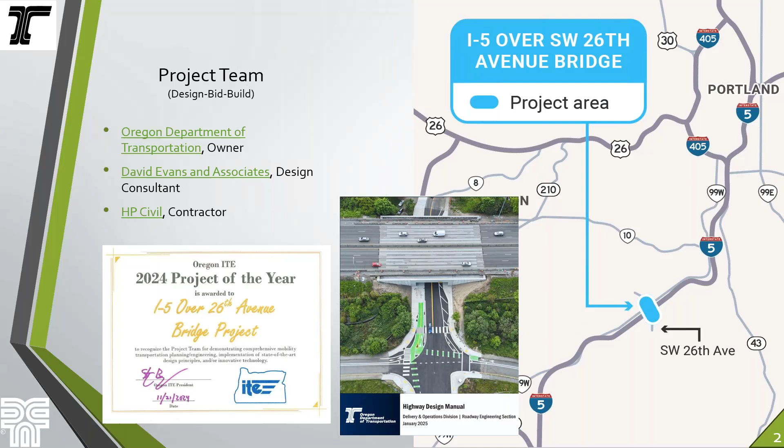Next slide. So just a quick snapshot of the facility. You can see that it's pretty heavy on trucks, heavy vehicles.

Our goal was to replace the bridge with minimum impacts to I-5. Next slide.

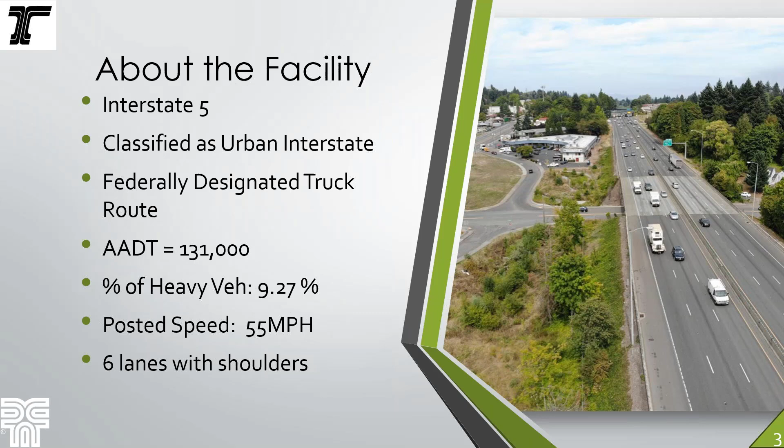So thanks, Robert. I'll take over from here and speak a little bit about the bridge. The existing bridge was a 3-span concrete deck girder bridge built in 1959 and was widened and overlaid in 1985 because the details of the bridge couldn't keep up with the loads that our transportation facilities were exposed to over time. There was some cracking in the deck and some delamination that justified the overlay, and then soon after the overlay was placed, it continued to crack and delaminate.

The facility, I-5, has very substandard shoulders and is highly congested in this area with long hours of delay. And the existing bridge is supported on timber piles. There was a project before ours to consider retrofitting this bridge, doing a seismic rehabilitation, and they decided that it would cost too much to do the rehabilitation and replacement was justified.

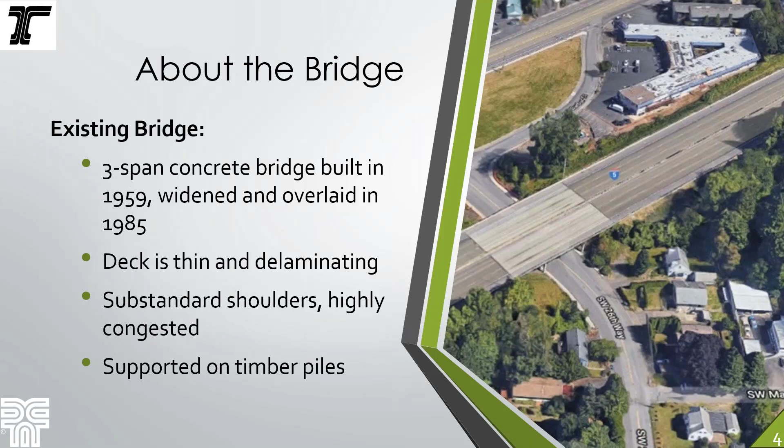So the objectives for our project were to replace the structure with a new structure that could meet today's seismic standards, and static design standards for that matter, using traditional construction methods. That was the original scope of the project. We were to maintain all 6 lanes of traffic, 3 lanes each way, at all times. We were going to widen the shoulders from 10 feet to 12 feet so that when maintenance crews are out there, they don't have to close a lane down.

And there was an adjacent City of Portland project where they were improving the local street underneath. And so we coordinated with the city to construct part of that project for them as part of this project and tie into the rest of their project.

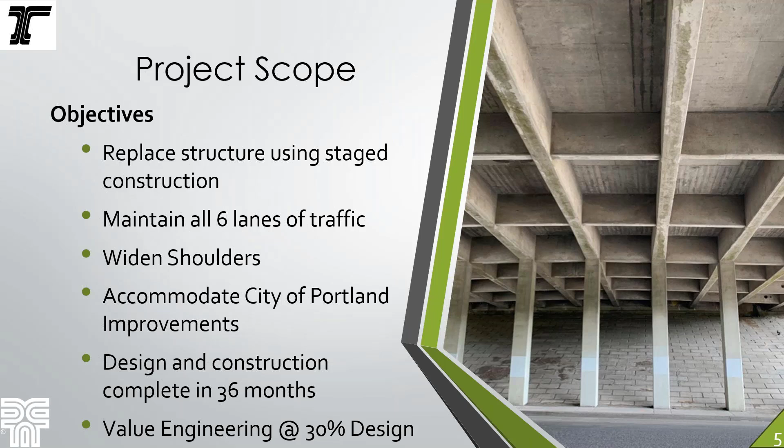Design and construction was to be completed within 36 months. That was primarily because ODOT had many large projects in the metro area that were going to be constructed starting in 2025. So we had to do our project in a somewhat accelerated time in order to have our construction complete in 2024. And as part of this project, ODOT wanted to do a value engineering study to make sure they were the best stewards of the public money they could be for this facility.

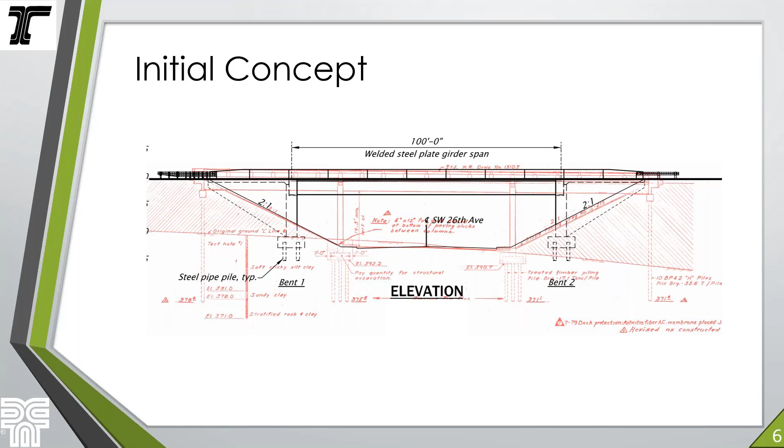So we started working on our 30% design. The existing bridge was a 3-span reinforced concrete deck girder structure, shown in red on this view. In black is the replacement, the 30% design. It was a 100-foot long welded steel plate girder with the supports located between the existing abutments and the interior piers. The concept was we would demolish the existing 3-span bridge and construct the single-span structure using stage construction methods, completed in 5 stages.

And there would be an island work zone where the contractor would be working in between traffic. A detour bridge would be constructed in order to shift traffic off the existing southbound direction, and they would maintain traffic in the northbound direction in stage 3. That's the island work zone. Then there would be traditional shifting of traffic, stage construction and demolition from that point on. At the 30% design, our construction cost was estimated at just over $19 million.

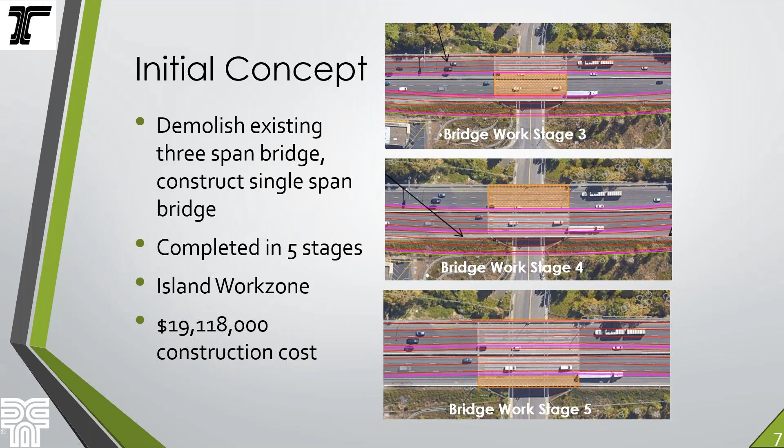So some of the risks around the more traditional construction approach at 30% design was that right-of-way was very tight. We didn't have a lot of room to put in the detour bridge. It was going to be substandard alignments, or pushing the limits anyway on the alignments for the detour structure, and we'd be right up against the right-of-way.

There is a water quality facility that was located adjacent to the structure. And that facility treats the stormwater for quite a long range along I-5, as well as the local streets in this area, because the bridge is located kind of in the dip of this region. It's kind of the low spot in a region here, and so a lot of the stormwater comes to this water quality facility, and impacting that facility, which would have been impacted by our detour bridge, would require upgrading that facility to current standards, which would have cost millions of dollars just in itself.

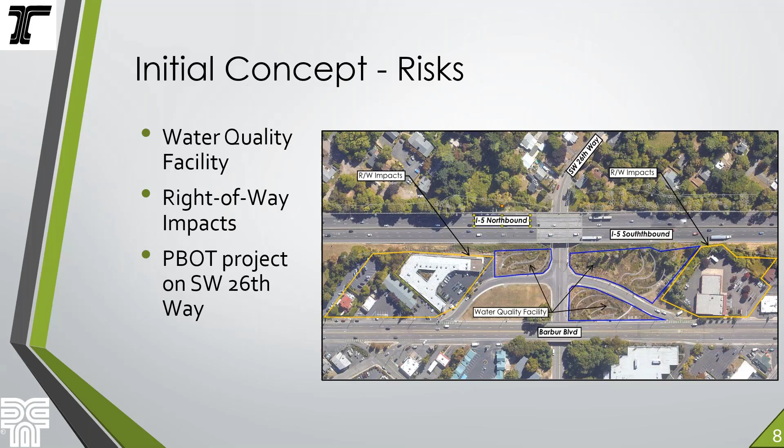And then, of course, as I mentioned before, there was the PBOT project on 26th Way that we had to accommodate as well, and that factored into some of our decisions there. So at that time, we got to the 30% design, and that was the scheduled time to go through a value engineering process. This group probably has been involved in these processes before, but just to give a little bit of information,

it can be an extremely important process for projects to make sure that the use of the public funds are going as far as they can be. When it's done right, I'll say, it's a very systematic and structured approach to figure out how to get the most value out of a project, the products, the processes, and the services.

And one of the most important aspects of it is really to put on your creative hat and think outside the box and see if there's some innovations that you can do, or some ways to really capitalize on that value. And of course, the value is increased by increasing your performance of the requirements that you're trying to satisfy. But value is also largely increased by reducing cost, time, and risk.

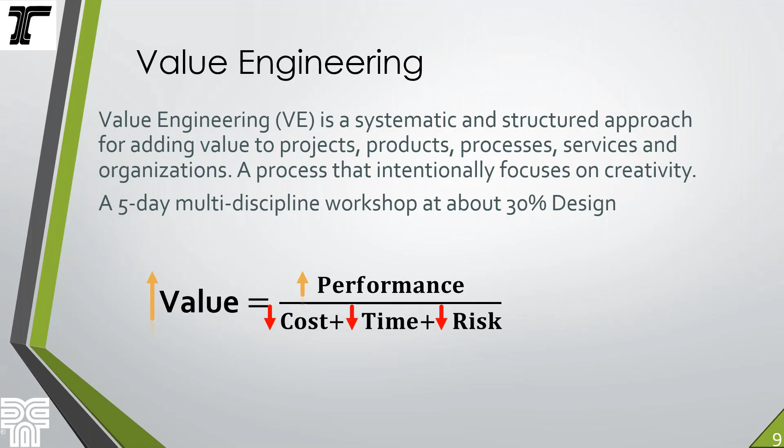So there were, I think, 10 alternatives that were proposed by the value engineering team. It was a mixed team of consultant staff and agency staff, and the design team was a part of the process, of course, in helping the VE team lay out the requirements, or the goals, I guess, for the VE study, and then also responding to the VE alternatives that were presented.

So this first one was presented as the one that would have the most value. It was essentially to build a 3-sided box, like a concrete arch culvert, you might say, in the center span of the existing bridge, and to fill around that culvert with low density cellular concrete up to the bottom of the deck of the existing bridge. And the benefit to that was the existing bridge would just be left in place. It would be supported by the low density cellular concrete, and effectively by the new concrete arch structure. And then a lot of the issues with the deck were believed to be taken care of because it's now supported on concrete.

I disagreed with that a little bit when it was presented and in our response to it. Just the difficulties in making sure that the LDCC would actually solve the problems with the deck. I really struggled with that. So there were some constructability issues that I was concerned with. I felt like the condition of the deck was bad enough. It would just remain bad enough so the asphalt overlay that would be put on top of the deck would still become cracked and have a reduced service life because of that. Also, all of the weight of the bridge is still supported on timber piles, of which we'd have no idea of the condition, and they provide no seismic stability.

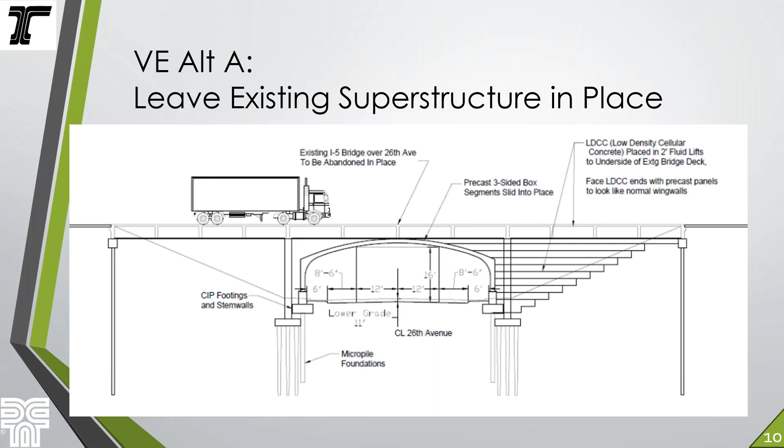So the next idea that they came up with is the one that we talked about internally and decided that this would be still a great value for the project. I'll call it Alt B; it's very similar to Alt A, the first one, in that it's still building a three-sided box in the center span, placing LDCC around that structure, but only taking the LDCC up to about the bottom of the existing superstructure.

And then, after that is all constructed, demolishing the existing superstructure and replacing it with fill and ag base and pavement, so that you're not actually driving on the deck of the existing bridge that's in poor condition. So it mitigated the deck condition concerns, and mitigated the concerns about the timber piles because the load of the structure is no longer supported on the timber piles.

But both of these options, I should mention, have pretty restrictive clearances with the shape of the arch. A lot of these arch products are limiting in the clearance. So both alternative A and alternative B required lowering of the existing road, which had some complications associated with it, and also required the traffic to be located right in the center of the arch because of the rounded shape at the top of it. We did talk about some other structure types that didn't have that rounded shape, and afforded us the ability to kind of open things up a little bit more underneath there.

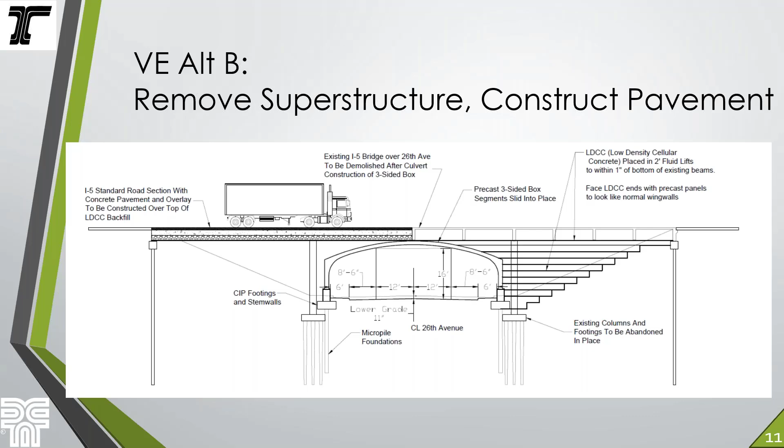I want to note that the VE alternative assumed that the demolition of the existing bridge would happen in stages, and that was troubling to the traffic team. And so our final concept was similar to alternative B, where we ended up demolishing the existing superstructure, but instead of using the arch culvert section, we used an ODOT standard pre-stressed precast concrete slab, and that opened up that clearance to 26th Avenue a little bit. It had a more consistent clearance, I should say, across the whole width of the required horizontal opening, and allowed us some flexibility from a traffic standpoint if we wanted to stage traffic within that opening somewhat.

We ended up not lowering 26 because of all the complications that were associated with that. We felt like we could just live with, I guess you might say, the clearances that we end up with. And since no trucks really have to go under here, we settled on a number that everybody was happy with.

Something that wasn't addressed in the VE study was settlement mitigation, because we were using low density cellular concrete, but even with the lightweight nature of that fill, there still was some additional settlement concern because of the softness of the soils here. And we have the existing bridge supported on piles that we didn't want to add down drag loads onto. So we had to employ some settlement mitigation that I'll talk about a little bit later on.

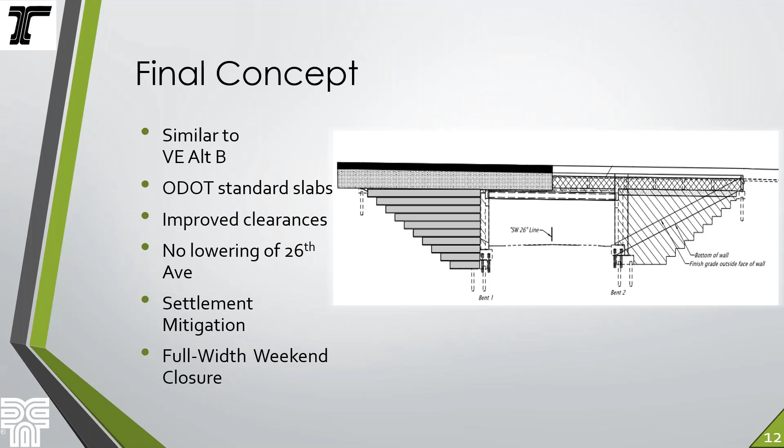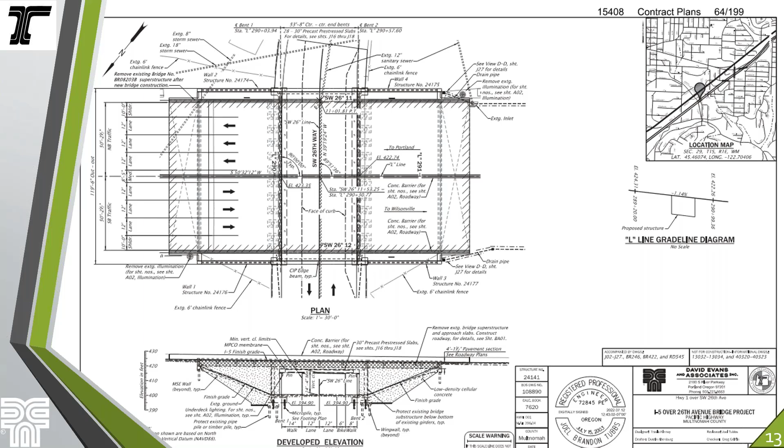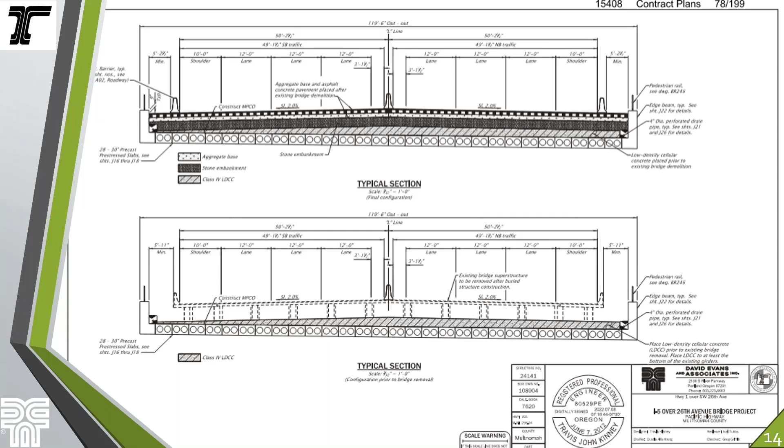The upper typical section there is the final condition with some edge beams along the side to retain the fill that's on top of the slabs. We called for stone embankment on top of the LDCC, ag base on top of that, and then asphalt pavement on top of that.

So a few things about maintenance of traffic for this project. We were allowed to close down 26th Avenue, the local road underneath, for all the construction of the bridge, really. And there was a short local detour. I don't have a map of that detour, but it was reasonably short. Cars can get around easily, and the community can get to where they need to go by car pretty easily. The 6 lanes, 3 lanes each way of I-5, were maintained, except for that weekend closure. There were also some nighttime closures after the weekend closure to do some final lift paving that we'll talk about a little bit later as well.

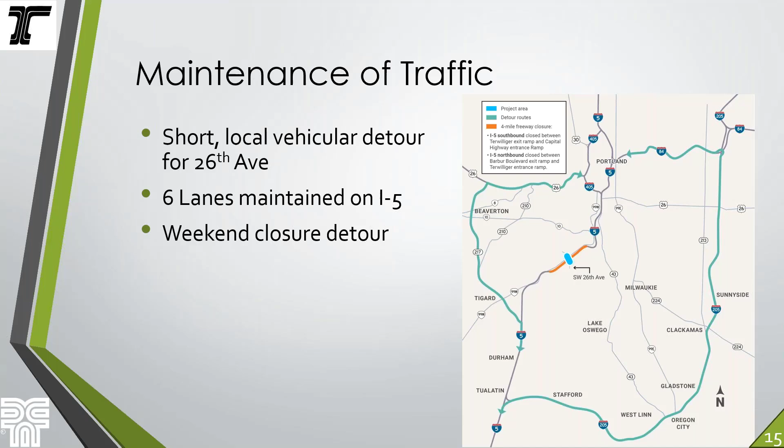But from a pedestrian standpoint, the vehicular detour was too long, reasonably, for pedestrians. And so this option really afforded us the ability to maintain pedestrians through the construction zone, through the mid span or the center span of the existing bridge, while they're doing the fill in the end spans.

I can't tell you how many people I heard from. There were several people that I heard from, both the people that I work with and members of the community, that were really pleased with our ability to maintain pedestrians through this area, because there's a local taco truck that is parked nearby that is a really popular destination for the community. So I thought that was kind of funny.

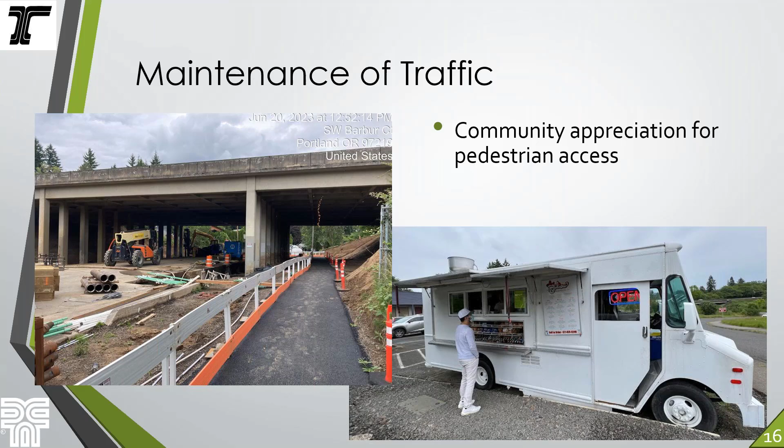Also, just side note, my parents love to go to different project sites with me. This was one of their favorites, and I would take them here, and we had the ability to walk basically all through on the pedestrian route here and check out the construction kind of as it was going on, and they just love that.

So the highlights of this concept and this project were: you reduce impacts to I-5 traffic. Instead of having 2 years of traffic impacts on I-5, it really reduces it down to about a weekend plus some nighttime closures. The bridge, this is one of my favorite stats about this project. For the bridge construction as well as the demolition, there was no I-5 traffic in the work zone. All of the work was either happening under I-5 for the construction, or the traffic was diverted around or detoured around other areas so that during the demolition, it was just a full width closure with no I-5 traffic.

The project reduced construction costs, as Robert mentioned, and reduced the construction duration, and the pedestrians were easily accommodated. The bad, of course, you have to fully close I-5, and there's, I'll say, never a good time to do that, but with a lot of communication, I think it went pretty well. You've also got to figure out how to build a bridge under live traffic, and then how to demo the existing bridge on top of the elements that you just constructed. So those were some of the challenges.

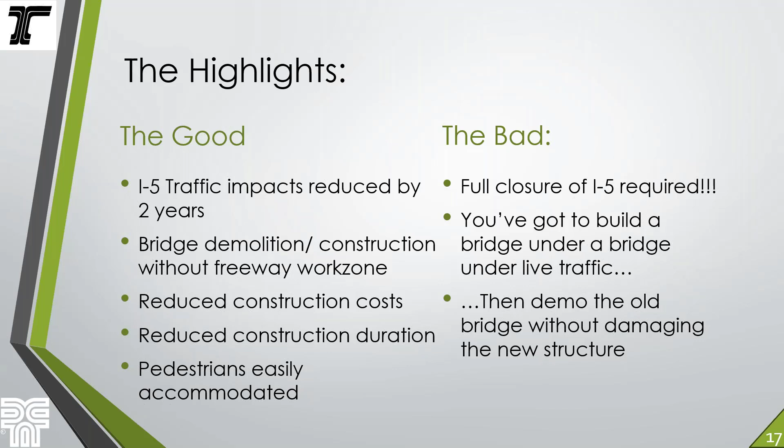So in the presentation here, I'm going to talk a lot about the accelerated bridge construction and other specialized techniques that we employed in order to accomplish this project. And the first one is a contractor constructability review. One thing I want to mention, especially for this crowd, I'm sure there's a lot of people here that have a lot of experience with any one of these elements. And it's not that any one of these are all that unique per se, but this project combined a lot of different techniques, and I think that's kind of what makes it special, at least for us here in Oregon. The contractor constructability review, I'll talk about that more in a few minutes, but that was a very important part to give us confidence in what we're doing.

We used micropile foundations due to the overhead limitations. We have precast concrete elements with the slabs. We laterally translated those beams underneath the existing bridge because we didn't have access vertically. We had to come up with a way to connect the slabs to the abutments after sliding them in with overhead restrictions. So that was a specialized detail we came up with. We used low density cellular concrete not only for the fill behind the abutments, but also for the reinforced fill of what's typically called a mechanically stabilized earth wall. But this is a mechanically stabilized low density cellular concrete filled wall.

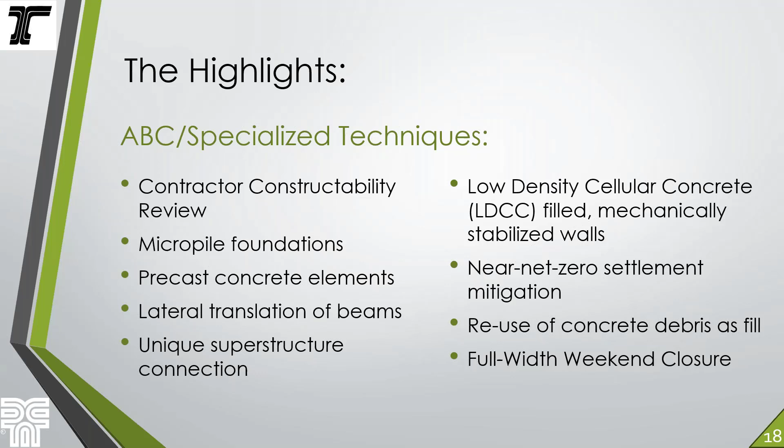For settlement mitigation, we used a near net zero approach where we over excavated to achieve basically a near net zero difference in pressure at the excavated surface of the ground. This was a concept from the contractor that came out of the constructability review session, but we reused the concrete debris from the demolition as fill underneath the ag base. And then we had the full width weekend closure for the project.

So the constructability, I'm not going to spend a whole lot of time on all these slides. We've got a lot of slides to get through, so I'm going to touch on some high points here. But the constructability review sessions with the contractors were one-on-one sessions with 7 different contractors. They can say what they want to, but everybody knew going into it that all of the findings or all the discussion was going to be published with all of the other contractors that attended the sessions.

And so some of the items the design team was wondering about was the bridge demolition, how best to do that, and can we get that done in a weekend? The micropile installation, we wanted to get some specific information about recommendations for that. The bridge construction, of course, how to accomplish getting the beams where they need to go, some of the specific details about how to connect the beams to the abutment and all that. The pavement construction, again, can you get that done? What are some things that we can do to make sure that can happen within that weekend closure?

The retaining wall construction: at the time we did the constructability review, we were assuming soldier pile walls to retain the low density cellular concrete, and that was because these LDCC filled MSE walls are not something that's commonly done in Oregon. It was only done one other time that I'm aware of for ODOT, and on a much smaller scale. And so we had to go through a process to get that figured out.

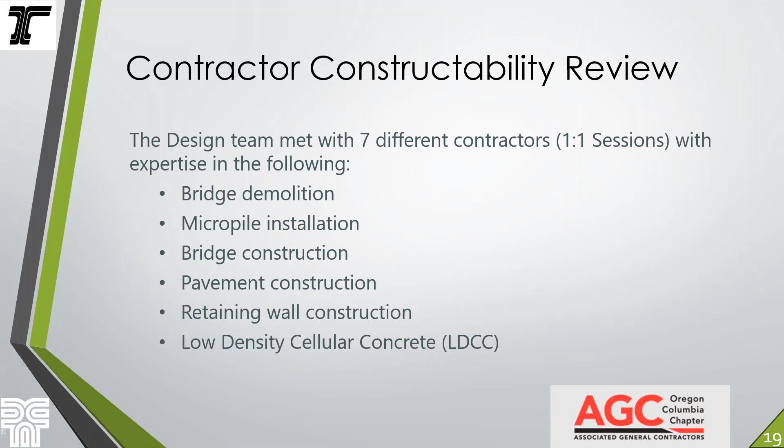Some of the findings or opportunities that came out of that review were to allow the bridge debris to be used as a sub-base underneath the ag base. And so we decided to go ahead and allow that. One of the suggestions from the contractors was to provide a staging and stockpile area near the site, and also allow off-road haul trucks that could handle more load on the freeway between that site and the project site, and also to switch from the soldier pile wall to the MSE wall.

We had mentioned our idea of using an MSE wall with the LDCC, but that we didn't think that our schedule accommodated the approval process to get that through, and they said it's a much better idea to try and just get through that process and use an MSE wall instead of a soldier pile wall.

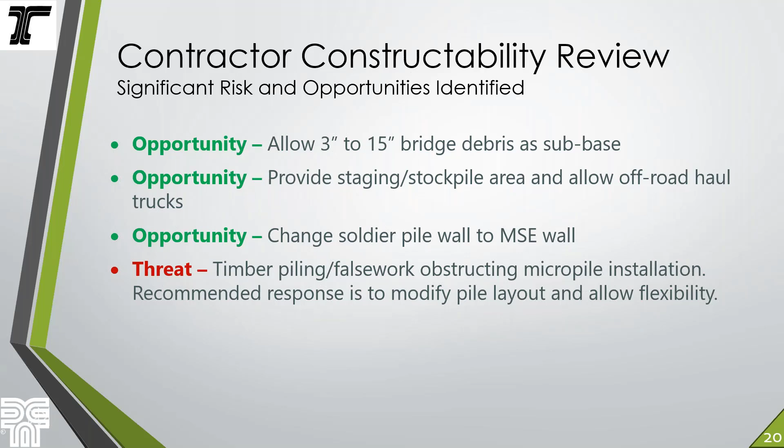And then they also mentioned the concern about timber piling, these kind of known unknowns, you might say, from a risk standpoint: we know that there's timber piles under the footings, but there's also possibly falsework timber piles underneath that we'd have to deal with. So I'm trying to figure out if there's a concern about that.

So getting into a little bit more detail about each one of these things, I mentioned the very soft soil, so deep foundations were required. We couldn't use shallow foundations. We had no vertical access to do traditional driven piles. And we had to do all this work with the existing bridge under live traffic.

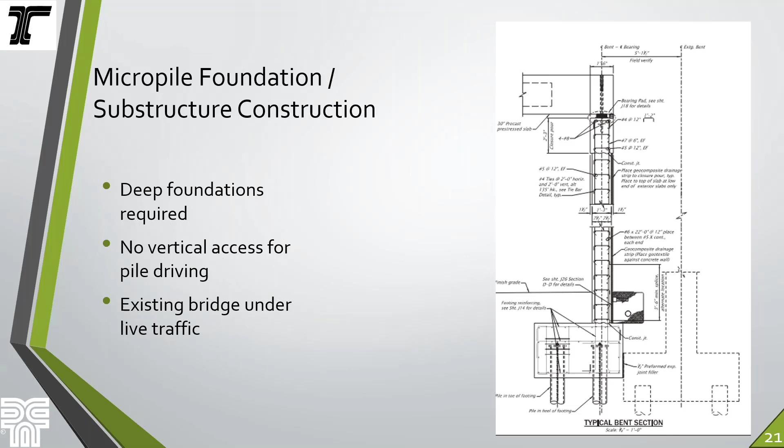One point I wanted to make on this one was that we tried to locate the existing footings, but we had limited scope in order to do that. We didn't do a thorough enough job. So we ran into some issues during the design where not every footing was exactly where we thought it was, and we had planned on building our footings effectively right up against the existing footing. So that created some issues during construction that we had to deal with.

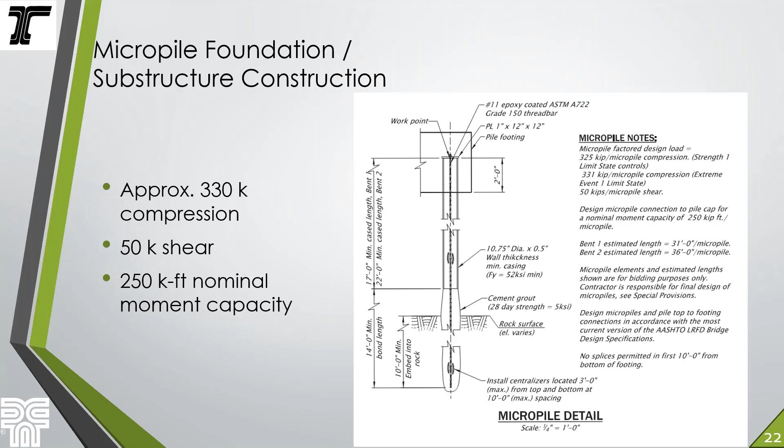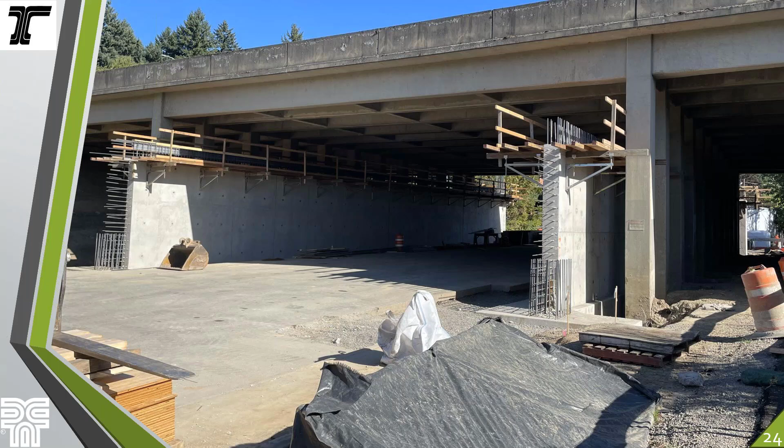This is a shot of after the abutment walls were constructed. This is the end from which the slabs would be slid underneath the existing bridge. So you can see some things are unfinished, to accommodate the translation of those beams. One of the interesting things, the feedback I got from the contractor, and you can see it in this picture, is they loved this job because it was all underneath the existing bridge. So in the heat of the summer, they had a nice shady area to work in. And in the downpour of the rain, similar situation.

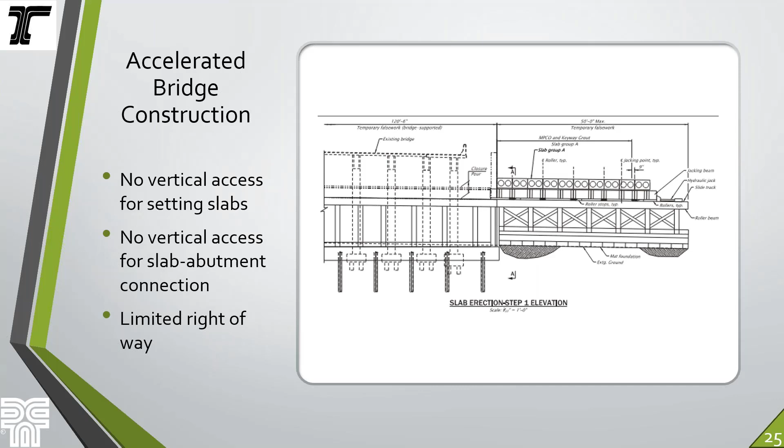So the next thing is accelerated bridge construction. Again, there's no vertical access for setting the slabs, and no vertical access for connecting the slabs to the abutments, and there was limited right of way. So we came up in design with a scheme that the contractor actually followed pretty closely, which was, with the limited width that we had to work in from a right-of-way perspective and for other impacts from the water quality facility,

we build some temporary falsework to the, I'll say route direction west side of the freeway. And we would set 10 slabs, that's all the room that we had there. 10 of the 28 slabs would be set first. We would connect all those together following traditional standard ODOT details, and put a waterproofing membrane using a multi-layer polymer concrete overlay, which added a little bit more protection also for demolition.

And then in step 2, we would slide those 10 under the existing bridge, set 10 more, go through the whole process again, connecting it to the first 10, and then slide all 20 of those beams underneath the existing bridge, set the remaining 8 beams and connect them with the previous ones, and then slide all 28 in step 4 to their final position, and then remove all the false work after the beams were set on the bearing pads.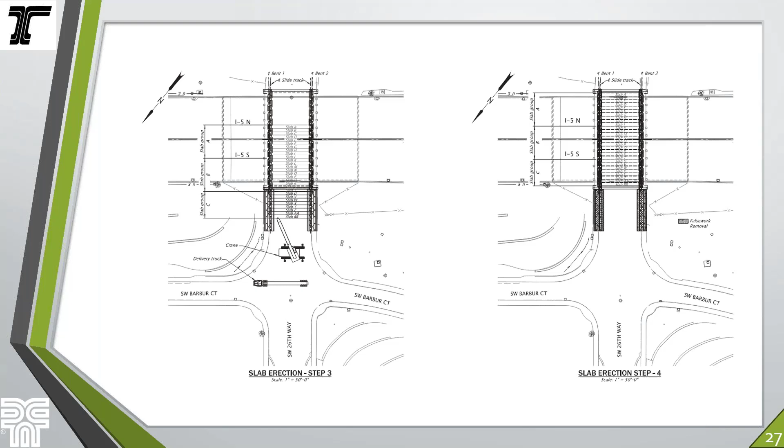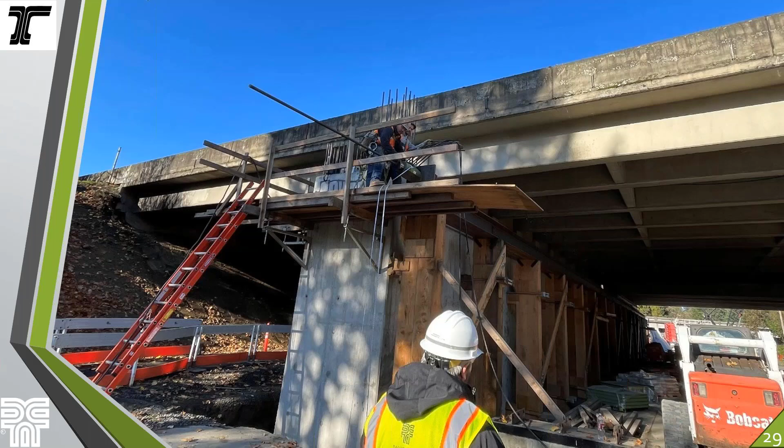So some details about that. This is just a shot during construction of the temporary false work and the first 10 beams that are placed out there. We had assumed that they would push the slabs. There's a little bit of an uphill grade on 26, and the slabs followed that grade. The contractor decided to pull the slabs instead of push.

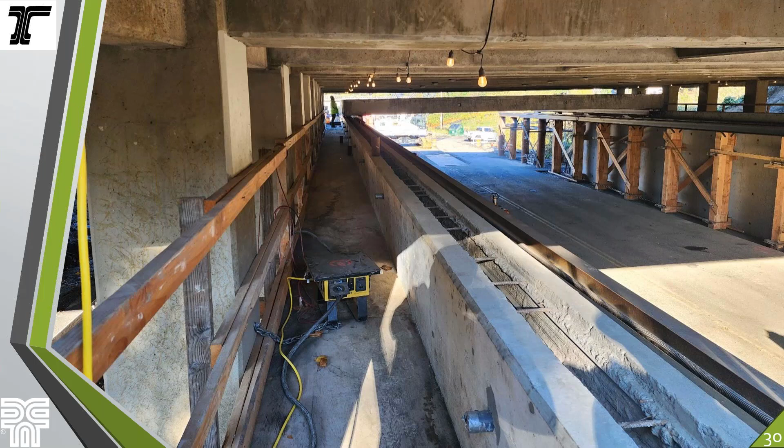One key element whenever you're moving these slabs: it's all a hydraulic system that has a manifold so that things are moving the same together as you're doing that. That's super critical, that everything's happening at the same rate at the same time so that things don't get askew.

This is a shot showing during that process the way that we connected the slabs to the top of the cap. We had in design assumed that they would not pour the cap until after the slabs were in place and sitting on the temporary false work, and then pour up, and then set the bearing pads and lower the slabs down onto the bearing pads.

The contractor elected to have a trough, more or less, constructed in the cap that would accommodate dropping of a pin. There's a hole in the end of the slab, and the dowel that connects the slab to the abutment is more or less the same length as the slabs are deep. And so when the slabs were in final position, they just kind of pulled the string and allowed the pin to drop into the trough, and then grouted the trough around the pins.

They also elected to adhere the bearing pads to the bottom of the slabs, and then kind of seal the area off around the bearing pads and pressure grout up to the bearing pads. And then after the grout is cured, release the false work from the beams.

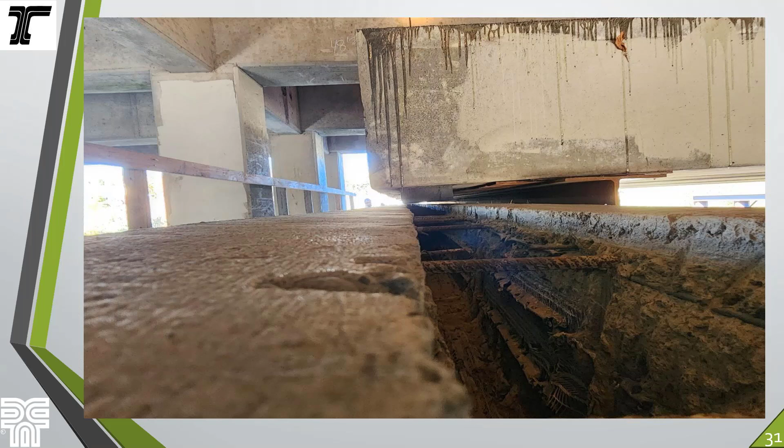All right, for the LDCC filled MSE walls, obviously it's to backfill the new structure, it's to protect the new slabs during demolition, like I mentioned before, and it's also to mitigate settlement. We used Class 2 and Class 4 LDCC. Class 2 is a lighter weight material. That was the bulk of the LDCC. But near the top, we wanted to have a stronger material to help further protect against the demolition activities that would be happening.

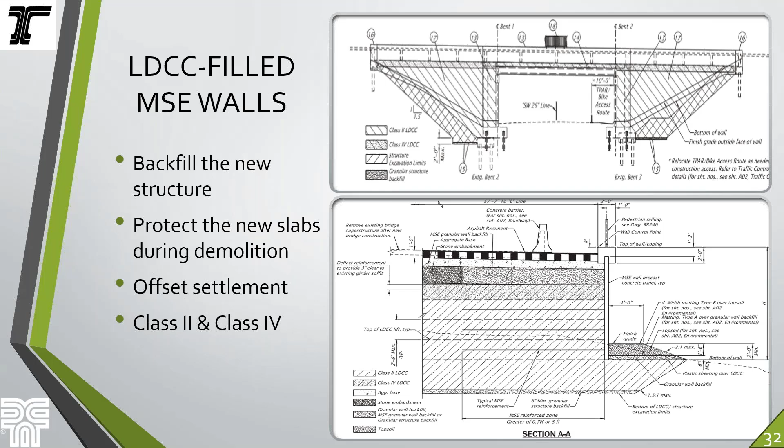One thing I wanted to point out, I'll turn on my laser pointer here real quick. You can see these dashed lines here. That's the existing bridge that's in place, and the MSE wall straps would conflict with this exterior girder that's right here. And so we couldn't complete the MSE wall before the weekend closure. We actually had to finish the construction of the MSE wall and place the reinforced fill along with the ag base and the pavement in that weekend closure.

So here's a shot of them pouring the LDCC, which isn't really all that exciting. My junior engineers that I had out there with me were kind of like, is that it? I said, yeah, that's it.

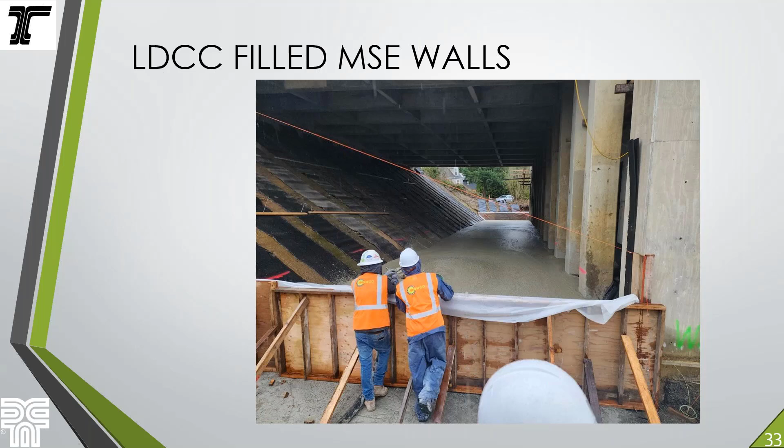Here's a shot after they filled in the overexcavation, and they're just getting ready to start building the MSE walls. For some reason, I don't really have a good shot during the MSE wall construction. One thing to note here is the pedestrian access. Like I mentioned before, during the filling behind the abutments, we moved the pedestrian access underneath the structure that's now been completed.

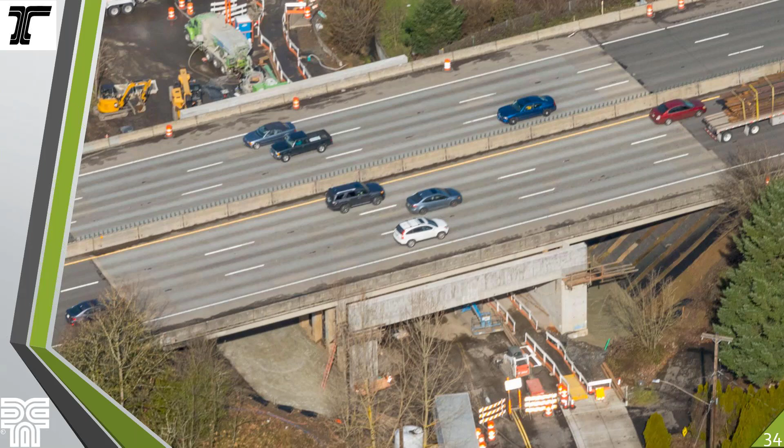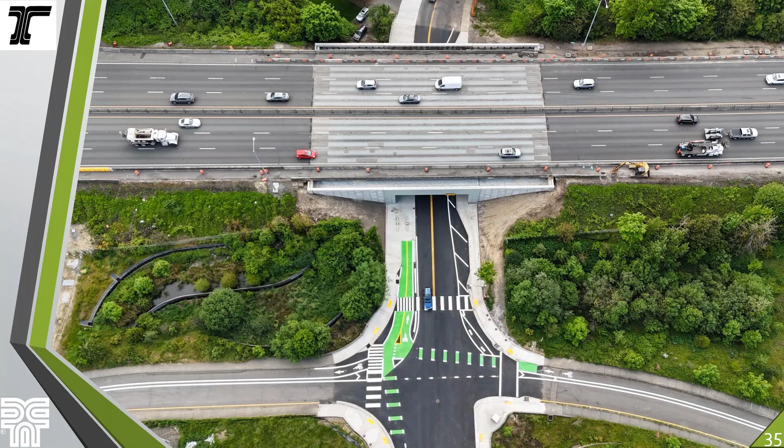Here's a shot of the project after the bridge is complete. The bridge construction is done, the walls are done. We're just waiting for the weekend closure to happen, getting prepared for that. You can see that the local improvements that we did as part of this project that connected to the City of Portland project to the east are complete, the local road is opened back up, and we're just ready for the weekend closure.

So the weekend closure, this is where the magic happened, you might say.

The weekend closure started Friday evening on June 28th, and there's a lot of coordination ahead of time, a lot of planning, a lot of communication about what was going to happen, when it was going to happen and how it was going to happen. An hour by hour schedule was developed by the contractor. The length of the closure was 56 hours. That's what they were allowed to get it completed in.

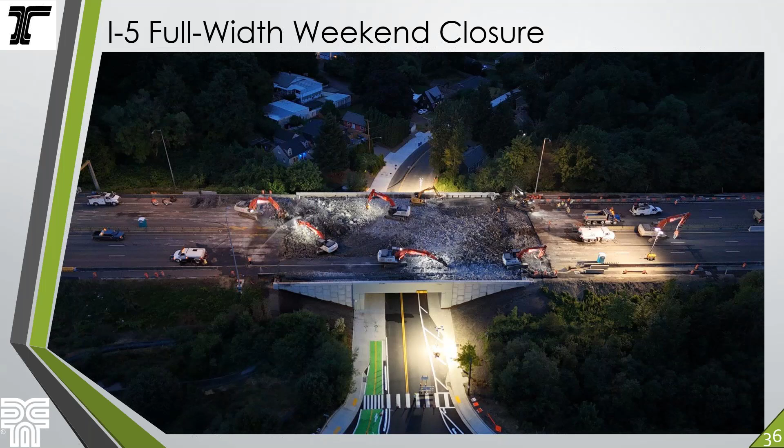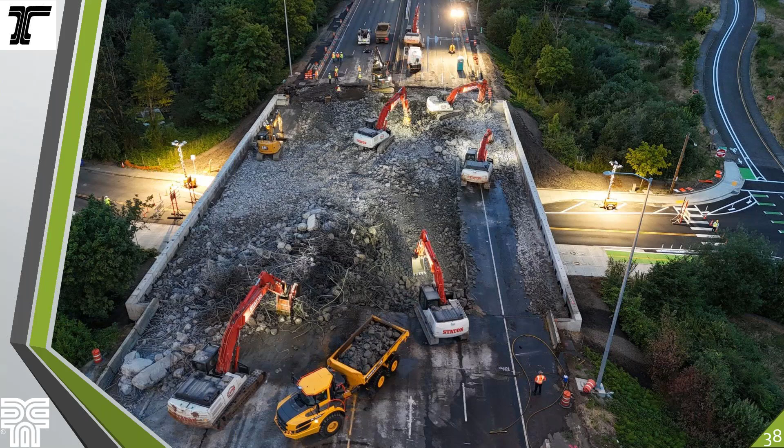So they came out and started from the northbound side of the bridge at the south end, and then worked their way back towards the north end. To use the concrete as fill, they had to process all the concrete, which is one of the reasons why we suggested they use stone embankment instead of the concrete debris, because of the time it would take to process the concrete and get the rebar out of there.

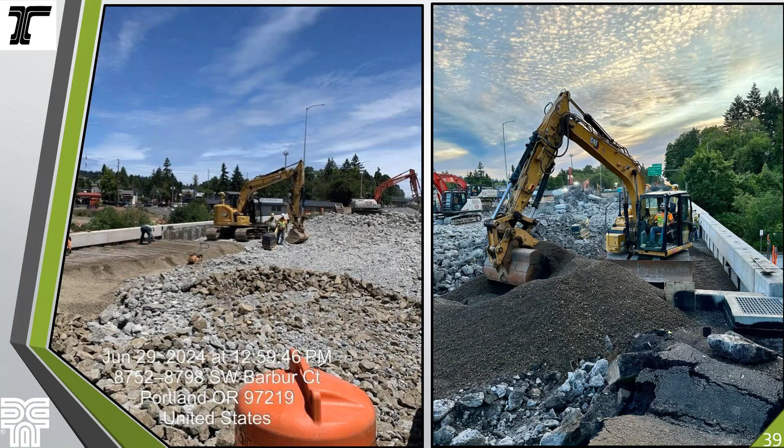So this is a shot on the right here showing the MSE wall fill, reinforced fill being constructed while they're doing the demolition or after they've demolished part of that structure. The photo on the left here I got from the inspector that was out there at 1 o'clock. They were supposed to be done with all the concrete processing and the stone embankment placement and starting to place ag base, and they were not close to doing that work quite yet. So they were starting to fall behind schedule.

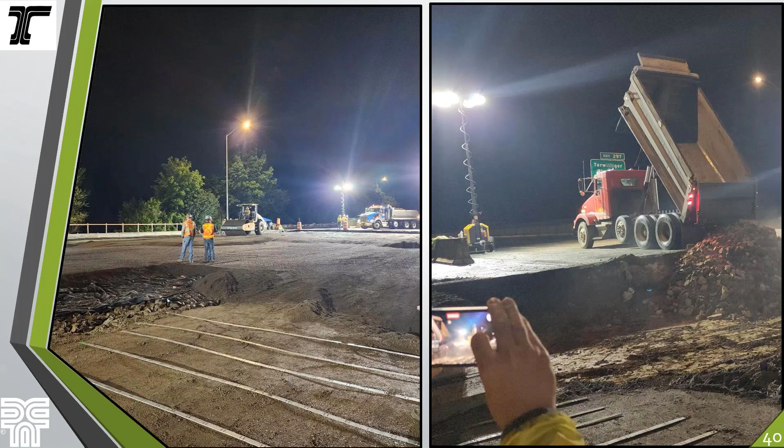This is at about midnight. I was out there with my boss, and we were checking things out. The superintendent and the owner of the construction company, you can see in the picture on the left, were very concerned. One of the things that I realized at this moment, midnight on Saturday night, was that the contractor was using all the same crew for the fill placement. It was the same crew from Friday night all the way to Sunday morning. So when we were out there Saturday night, it was like, why is everybody moving so slow? And then I realized it's the same people that I saw Saturday morning.

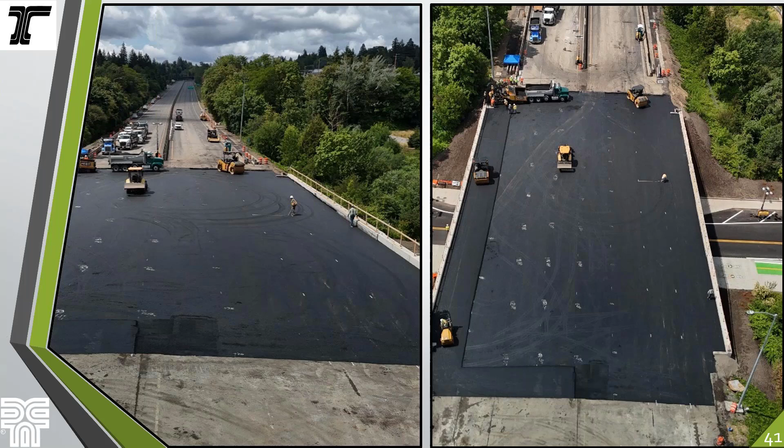So we're getting close. This is on Sunday morning, they're starting to do the paving. Just before they started the paving, they were 13 hours behind schedule on the 56-hour window. But miraculously, the contractor got it done and got it opened back up with 2 hours to spare. And this is a shot shortly after the weekend closure was complete.

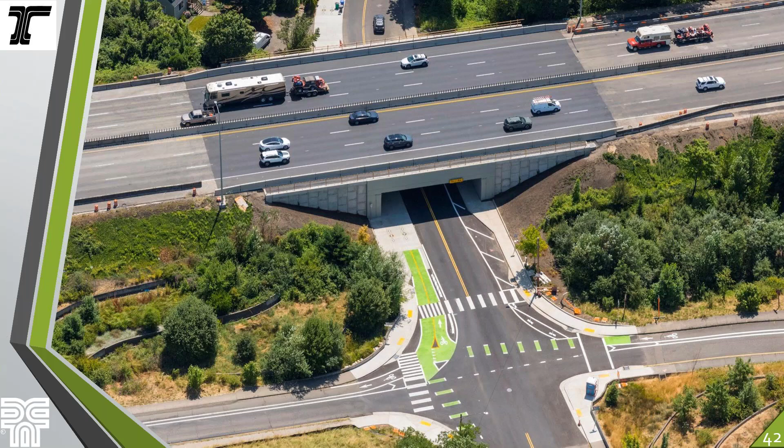So going through the proven value from a construction cost standpoint, we reduced the cost from 19 million down to 13.6 million. The schedule went from more than 24 months of construction time to 18 months. And impacts to I-5 traffic: instead of 5 stages over 2 years, it was 1 weekend with some limited nighttime lane closures. And being able to do the bridge demolition and construction without traffic in a work zone for I-5 is priceless.

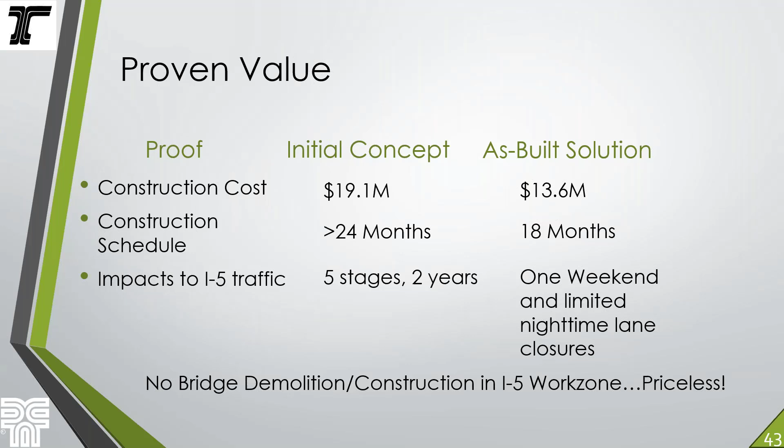All right, some lessons learned. VE studies will ask you to stretch your comfort level and question the standards and why we do things the way we normally do. Just embrace that process, because there can really be some good value that comes out of that. If you're doing something unique, or a combination of things that are unique, it's good to have the decision makers at the table all at the same time. Our process took 8 months from when we started the VE study until we knew exactly what we were doing, and there were some things that could have been avoided if we had adhered to this.

The contractor constructability review was invaluable. It gave us the confidence to know that we could achieve what we were trying to achieve, and that weekend closure really was reliant on their ability to do the work, so that was great. And on projects like this, especially when you're closing the freeway down, communicate some more, and then when you're sick of it, do it again, because the more that people are aware of what's going on and when it's gonna happen, the better. It's really important. So I'll turn it over to Robert.

Thanks, Joel. Yeah, I totally agree. It was priceless. Those VEs paid for themselves. So, how do we inform the public when closing a major interstate? The good news was for most of the project work, the traveling public didn't notice much because the new bridge was being built under the existing bridge.

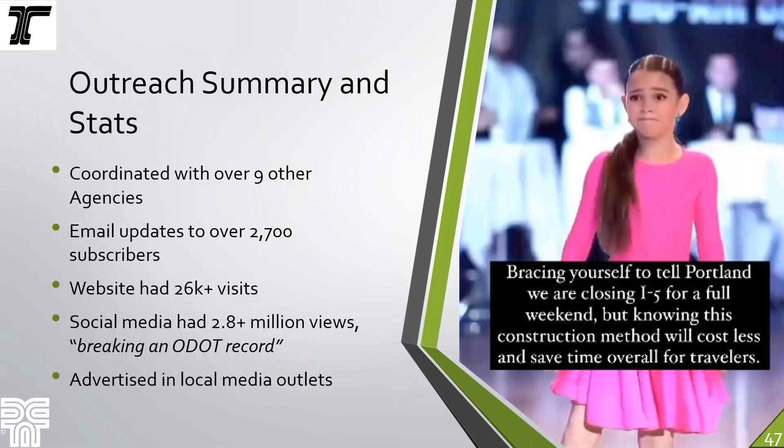So when it was all done, all major risks were responded to prior to the closure. We were able to complete the full closure within 54 hours. And our construction office did not observe any severe traffic conditions. So like Joel said, it was priceless. Next slide.

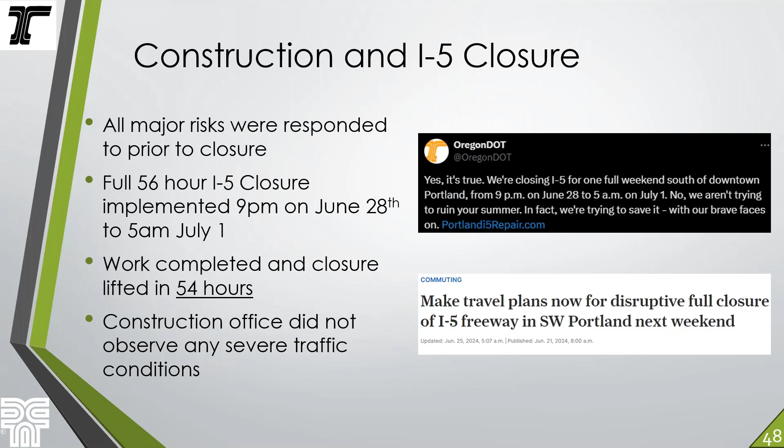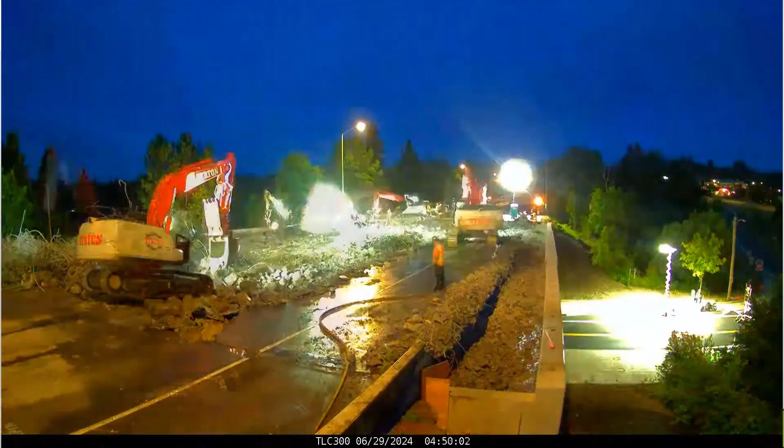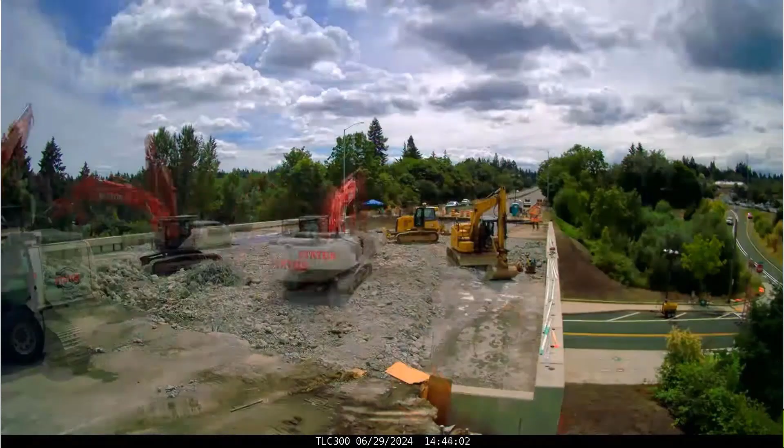Yeah, here's a time-lapse video of the construction. Just takes about a minute. I want to say this project was just an outstanding collaboration of a lot of different people. The communication and the collaboration we had with ODOT was amazing. The contractor review session that we had was invaluable. Like I said, it really provided us the confidence that we could do what we were trying to do and get that accomplished. We had just a lot of good communication and collaboration.

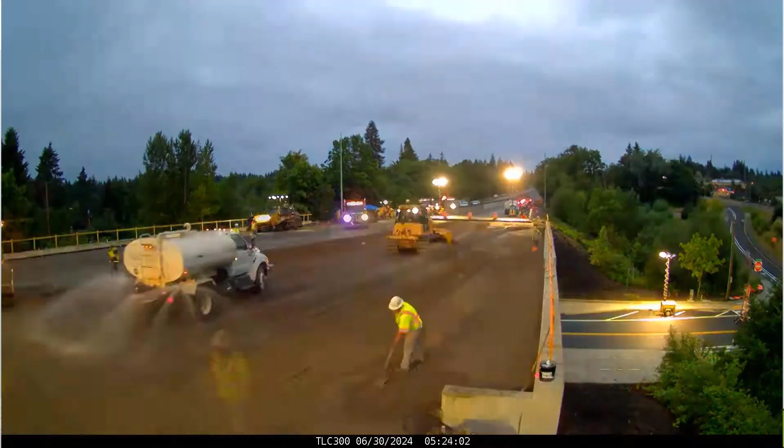In this video here, right there is where they started the paving. Again, that was 13 hours behind schedule, and they picked it up and were able to get it done, reprioritized some things, got the pavement completed.

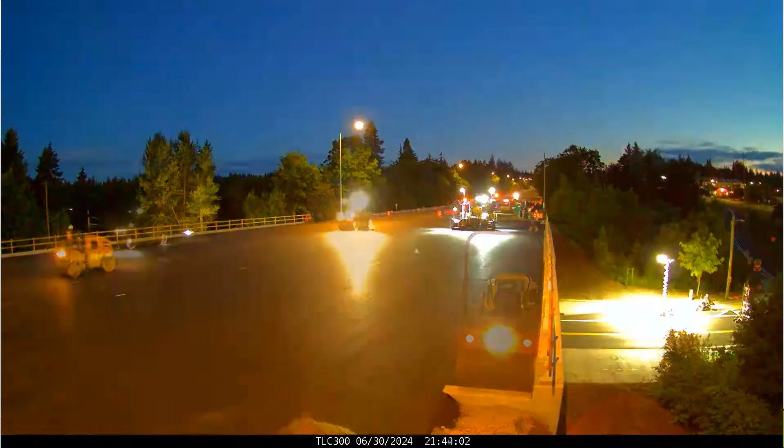I wanted to mention the pavement was constructed with asphalt base course all the way up to the top of the finished grade during the weekend closure, and then after the weekend closure, they did nighttime lane closures to grind and inlay a finished wearing surface. It takes longer for that finished wearing surface to be constructed, and we couldn't fit that in the weekend closure. So that's something that we considered during the design and allowed the contractor to do. So with that, I think we'll turn it over to questions.

All right, thank you for such a great presentation, very informative. I'd also like to encourage ODOT to consider submitting this project for our project database and contact Mary Lou Rawls. And if you need more information, just let me know. It's a very interesting project to be in our project database for others. At this point, we are going to turn it to Paul Lyles and Rick Liptic to moderate the question and answer period. Paul, you can take over.

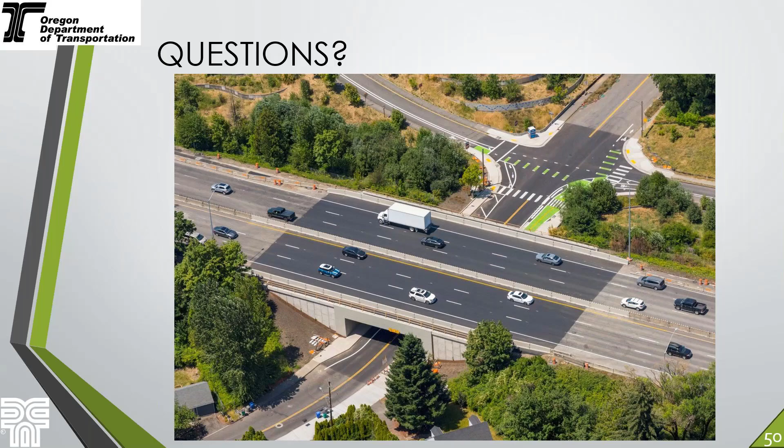Okay, thank you. And we'll get Robert. Y'all get your cameras on. Oh, sure. Joel. Yeah, and this will be good. We've got a bunch of questions coming in, and y'all get some more questions in. So we'll try and get to them. First of all, these are some questions that came in before, the pre-webinar questions, I call them.

The first one I have is, were SPMTs considered to move the completed bridge span into place? Did y'all consider that at all? Yeah, SPMTs were considered. Ultimately we leave it up to the contractor to figure out how to get the beams moved. We like to show an idea in our plans, and then the contractor can propose what they want to do, and they decided that following along with what we had in our plans made the most sense. Okay.

Another pre-webinar question was, how were the ABC components incorporated into the usual bid items, or were they separated depending on scope?